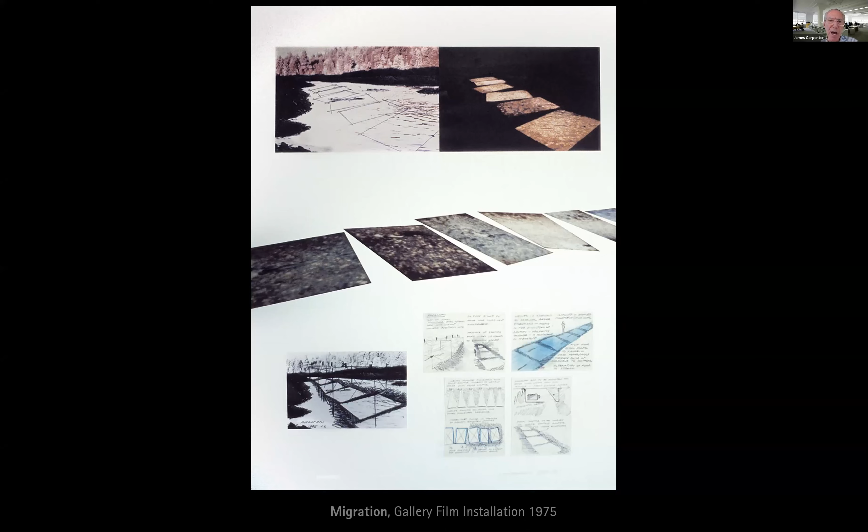In this instance, this is a small river in Puget Sound that runs by the University of Washington for introducing different strains of salmon. What we did is set up a series of cameras over the river, looking straight down into the surface of the water. You basically have a fragment of the entire riverbed with the movement of the salmon during their migratory journey going up through it.

What we're trying to capture here is: there's obviously this event taking place within the river itself, but if you imagine the thickness of that water, there's a reflective field of information on the surface in terms of the reflections, caustic reflections, and movement of the water. Then there's information within the water, which is the fish and other activation of the water itself. And then you're seeing beyond the water to the bottom of the river.

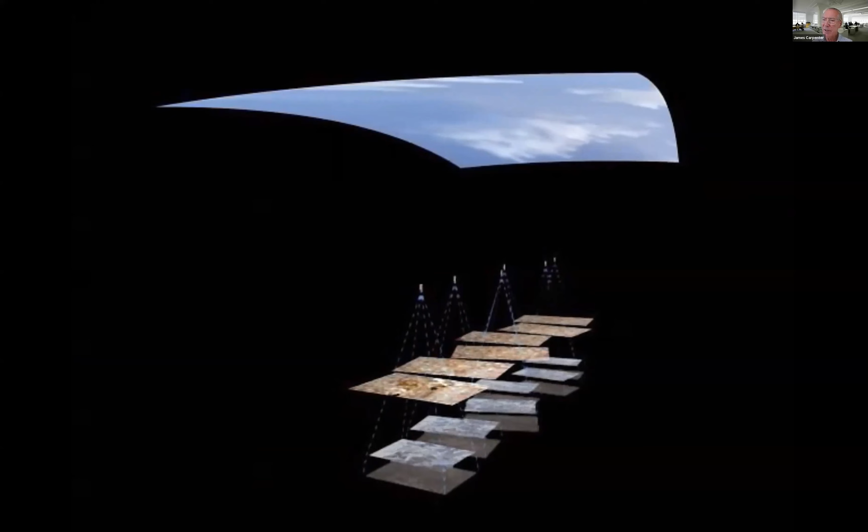This whole idea of a transparent material having multiple layers of information is really what we try to work on. This film, particularly in the installation, is about how the longer you look at it, the more you realize you're looking at this perfect reflection of the sky overhead. So there's always this level of information in front of us that we tend not to acknowledge, and many of our projects try to pull out of our context, or wherever the public space may be, events that are there but are under-acknowledged.

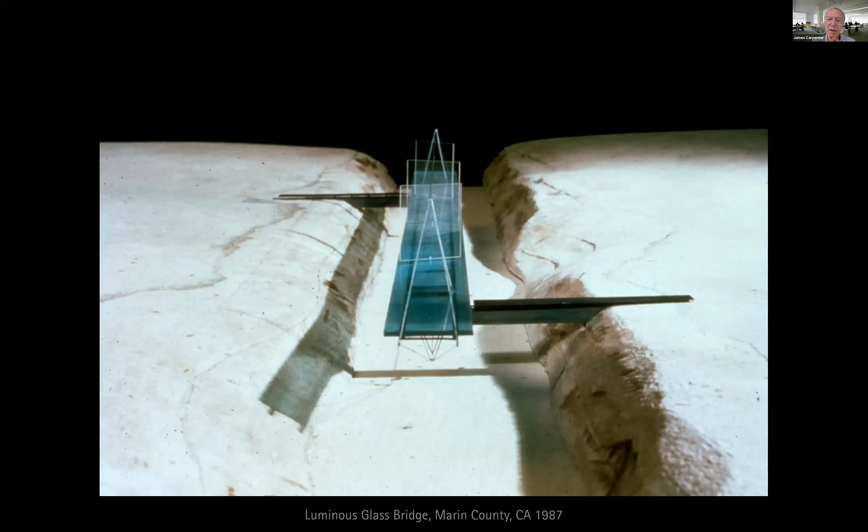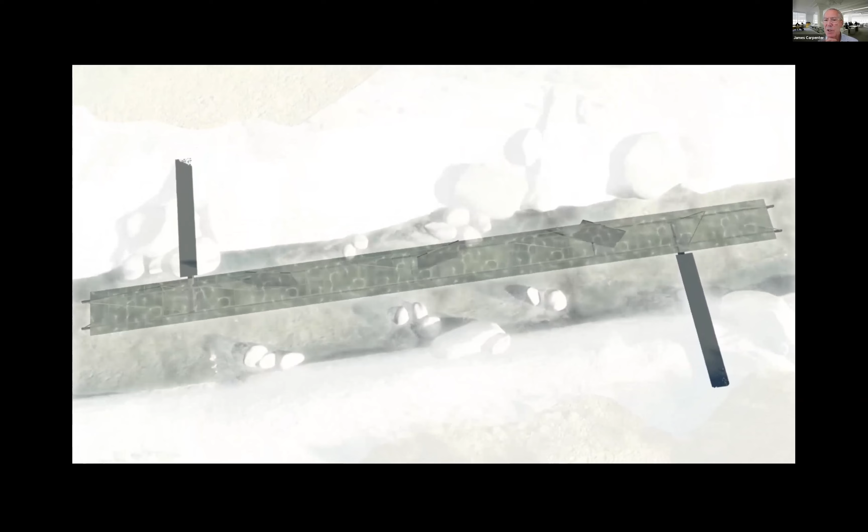So anyway, this particular film was from the mid 70s. If we look at the next project, about 10 years later, it was a commission for a small project, a bridge for a family in California. It's essentially a glass bridge, about 100 feet long, and you access it on these two gangways. Your movement of crossing the water is really along the glass platform, where you're moving in the direction of the river or against the direction of the river.

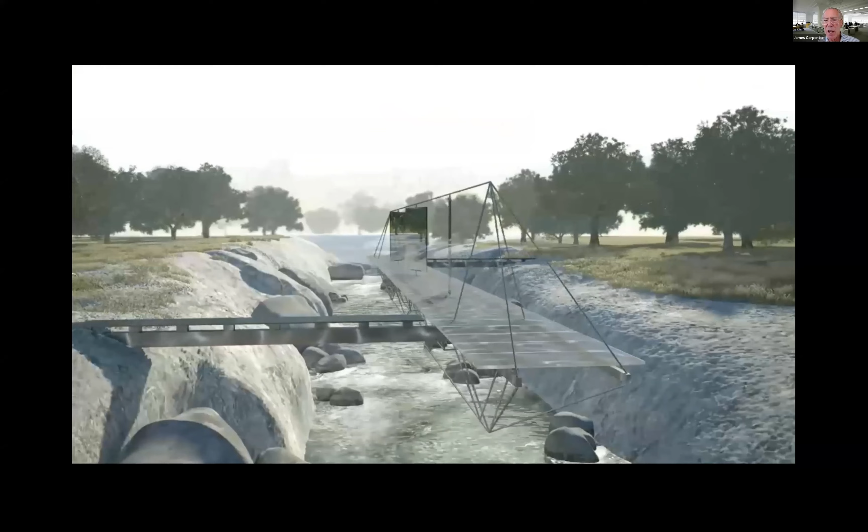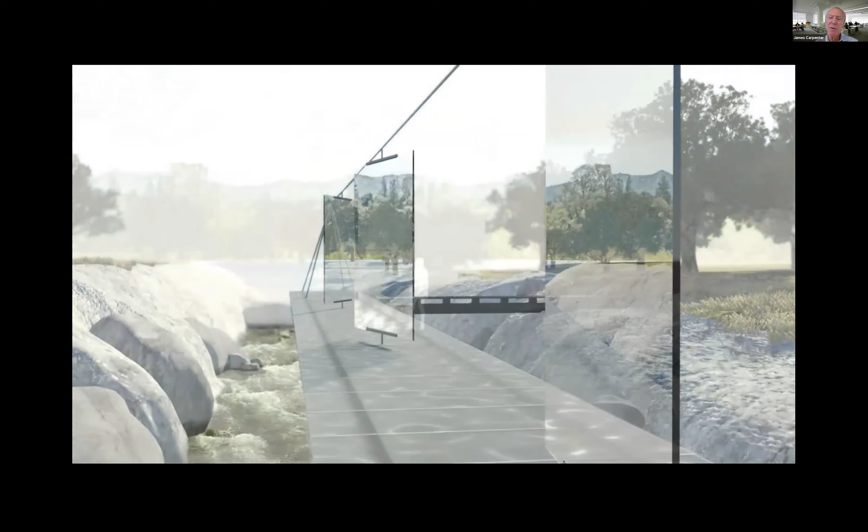So the walking surface, a sort of translucent glass, basically captures that reflected image of the surface of the water underneath it, so it's carrying caustic reflections. And the panels that move down the bridge are all slightly reflective, so they are basically superimposing different landscapes surrounding your passage.

The whole idea here is you're creating a moment in time where you can more deeply understand a particular ecology, and you have a sense of participating in this movement of the river itself alongside your own movement to get from one side of the river to the other.

So these types of projects, even though they were done quite a long time ago, are still sort of the root of many of the projects we do. And this is in Chicago, a project for the University of Chicago and for the city of Chicago.

What you're seeing on the left-hand side is really a plan for where the World's Fair would take place in 1893. The linear park you see there is what's in front of you on the right, done by Olmsted. The hope was to connect the lake at the north here to this inland park, and you would actually have boats and different things happening there.

But eventually this was just an ordinary sort of turf depression, and a very dark park connecting University of Chicago on the left there with the South Side community on the right.

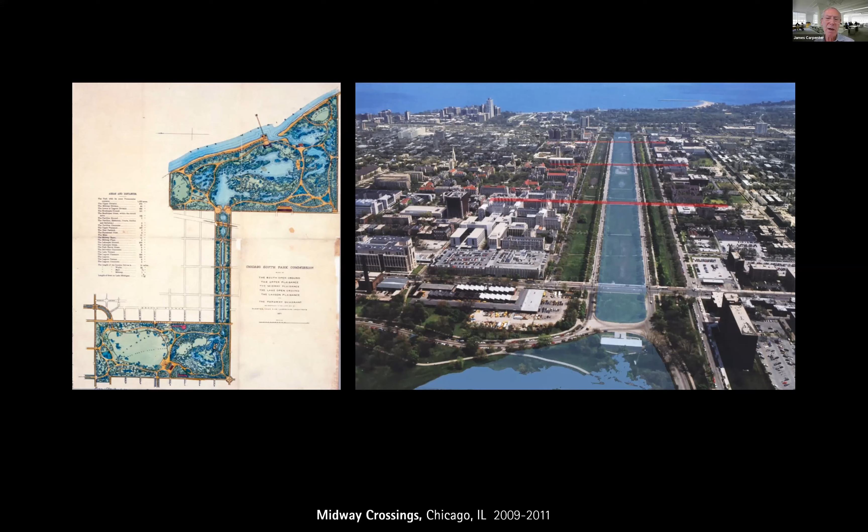So our task here was how to cross this park and make these parkways, the new axes across the park, much more vibrant, sort of safe, and very self-directive in the sense of wayfinding.

So we developed this whole idea of how to do these lighting towers, working with a company in Minneapolis that actually does filtration systems. We worked with them on making these towers out of continuously wrapped stainless steel wires around cores.

On the right-hand side, you're seeing the light source, which is basically just a quartz light source with what was called totally internal reflectance film. So it's really one source of light that goes up to the top of the mast and reflects back down to the mast, so none of the light actually escapes it.

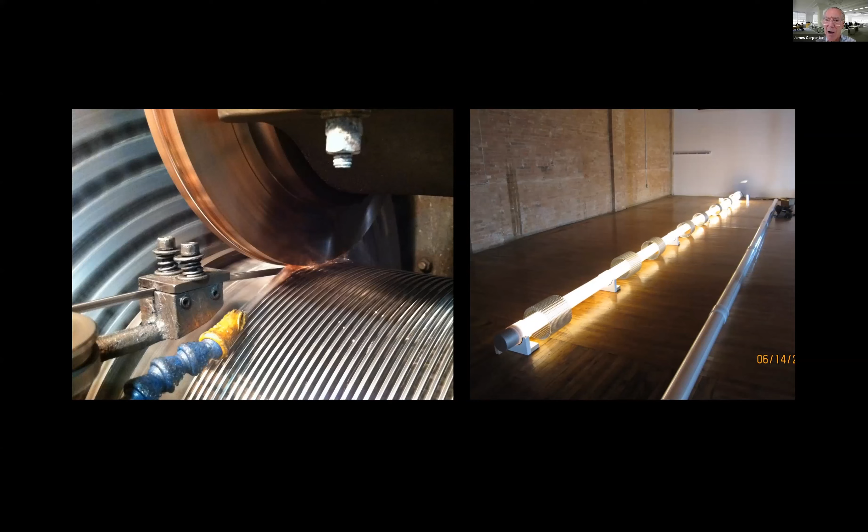In this image, we're testing the different densities of the cladding around that tower. By controlling the density and shape of the wire being wrapped, you create these actual columns of light that vary—there's greater intensity down low, and again a little more intensity at the top.

They are very different than conventional light fixtures, as you see in this transition to nighttime, in that they are emanating the light horizontally. So the figures are completely illuminated—you're washing the entire figure as you approach with the light source, as opposed to conventional lights, which are all coming from overhead.

Working with Schuler Shook, a Chicago lighting firm we've done quite a bit of work with, we removed as many of the street lights as possible based on the illumination we were providing. And then we created the center of these roadways as basically gathering spaces—right in the middle, there's a bit of landscape and some seating.

So instead of just rushing from one side of the park to the other, summer and winter, you actually have a place to gather and overview these public spaces where intramural sports take place, or a skating rink as well in the winter.

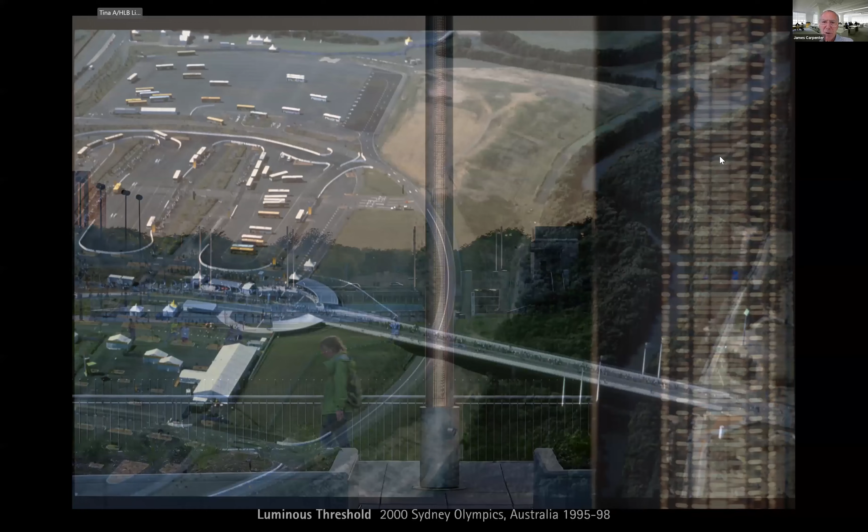This company is one that we've worked with quite often on projects, and that bridge we just showed you basically is a threshold between these two communities in Hyde Park and the South Side.

This is a threshold done in a very different way, for the Sydney Olympics back in 2000. This Olympics was really about reclaiming post-industrial, toxic landscapes, reviving them, capping some of the soil contamination, and returning them to public leisure use. We were asked to design the entryway to the park.

In this instance, you can see all the parking and athlete housing on the left, and you would move across this bridge into the Olympic Park itself with the stadium on the right. We took this small mangrove stream below the bridge and created this alignment of five masts over the bridge.

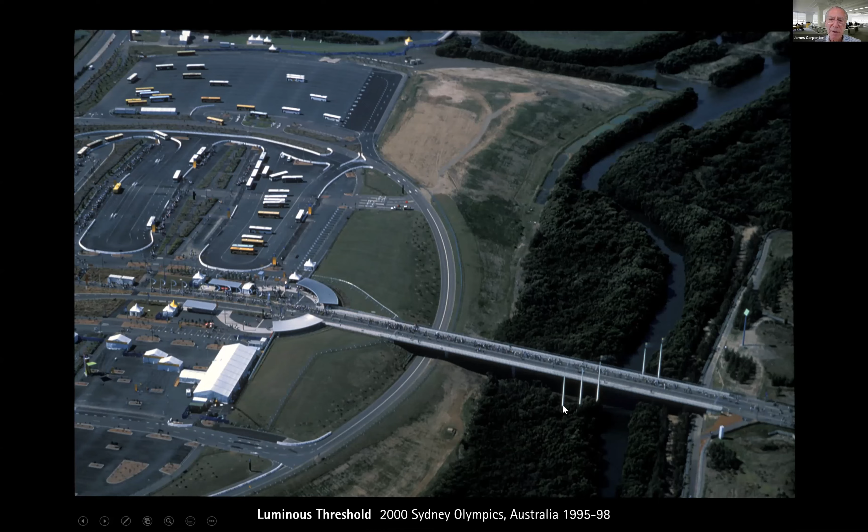The whole idea is to basically create a synthetic cloud. These masts are, as you see in the technical drawing, about 100 feet high, and the top 10 to 12 feet of each mast is a misting system. We're taking water out of the river, filtering it, and pumping it up under high pressure. Each mast creates a field of mist, and they blend together to create this cloud floating overhead when you're walking across this pedestrian bridge.

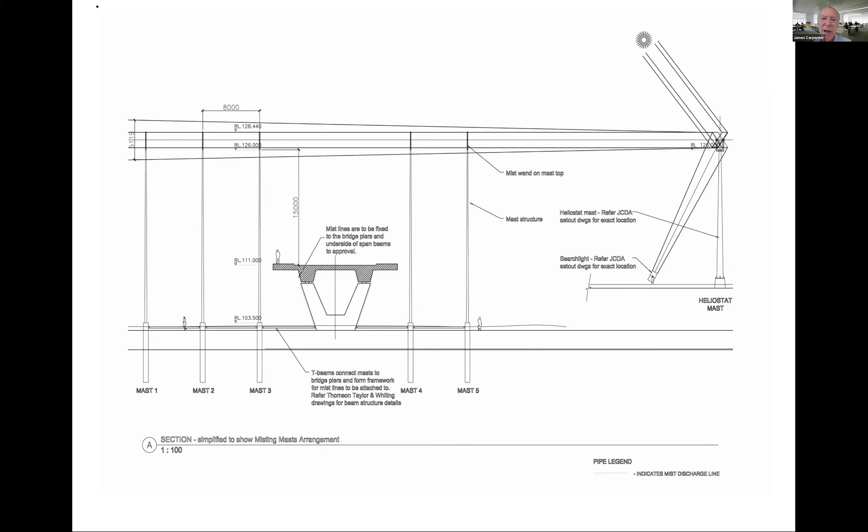So you're trying to counteract the intensity of the direct sun, in this case by using a filtration glass, a dichroic glass. It bounces all the yellow light back, to which your eye is very attuned and alert, and allows the blue light to pass through. So your eye actually picks up this whole beam of light. If it were not filtration glass, you would hardly see this beam, which is of interest—the eye wouldn't necessarily pick it up. It's just when you shift the color wavelength of the light that the eye becomes more aware of it. So this little mock-up led to the next image.

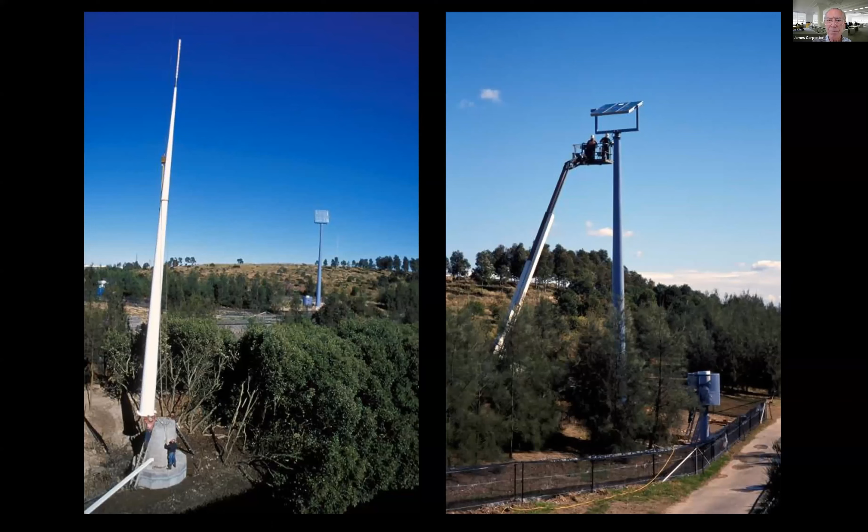This begins to show you the construction of it, the mast being built down in the riverbed itself. And then in the distance, you see the tall mast, shown again on the right-hand side here, with the men just getting the heliostat aligned.

The heliostat is basically a mirror system that tracks the sun all day long. Regardless of where the sun is in the sky, you can control a constant beam of light, which in this instance moves past and through the alignment of all the masts. The masts are all in a north-south alignment, and a beam of sunlight passes across the tops of each of those masts at all times of the day.

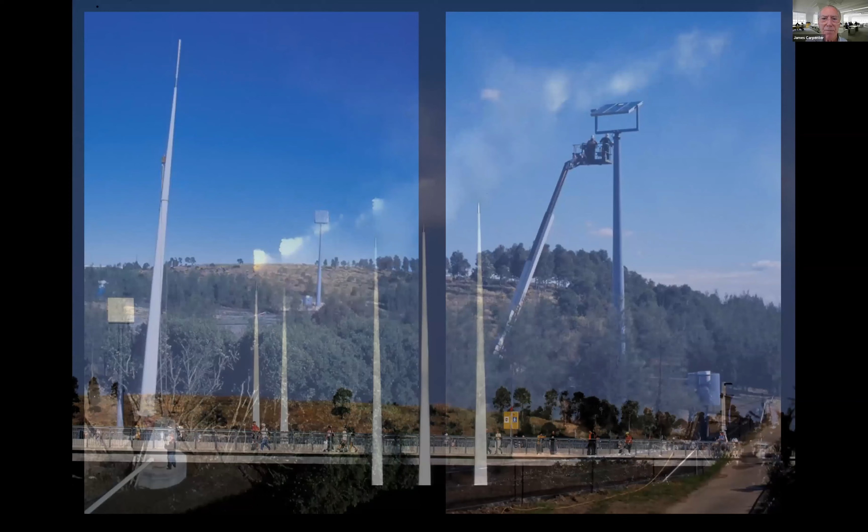So what happens when you walk into the park during the daytime is you walk through or underneath this cloud being formed overhead, and then you see this beam of light. Of course, with light, you don't see it unless it hits a target, so the mist is our target in this instance.

You're seeing it, and in certain instances it almost looks like it's on fire, but under different weather conditions it can be more fragmentary. On a very windy day it can be slightly more fragmentary, but on a very humid day you can get a solid beam of light that's literally almost a kilometer long coming off this one mirror.

So anyway, for the theme of the Olympic Park, this whole idea of renewal of landscape also deals with renewal of water resources. This is basically a work that draws your attention to the natural evaporation of water from the Earth's surface, its condensation in the air overhead, and its descent to the Earth by rain or mist. It's really just trying to take a process happening around us that we don't normally pay attention to, and allow it to become this signatory element celebrating this entry into the park.

So that's Sydney. I think that's the last image of that.

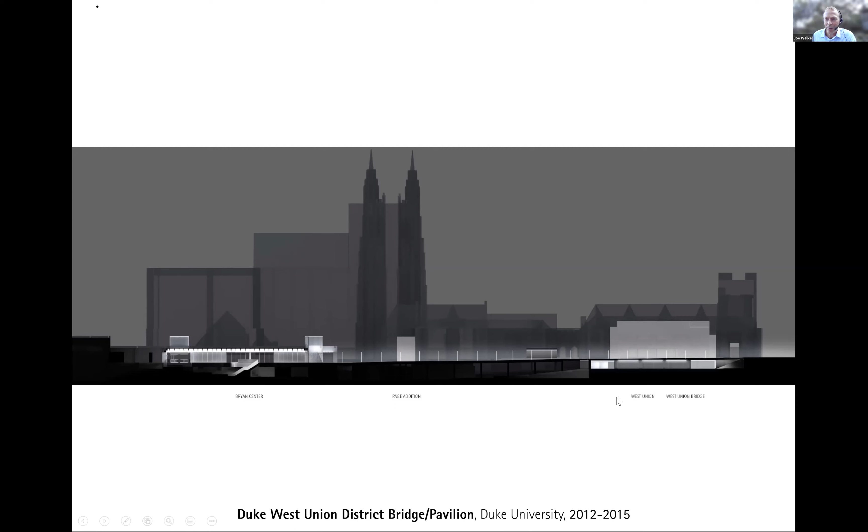So kind of building upon the threshold that Jamie was describing, this is a project at Duke University, North Carolina, which sought to expand and weave together some different parts that were very separate but occupied a lot of student use—specifically the student center on the left, an auditorium, and a bridge and kind of student gathering space on the right. This gives you an aerial view of what we were seeking to accomplish in terms of really knitting together what was a traditional part of the campus, but ended up having a lot of backdoor uses originally.

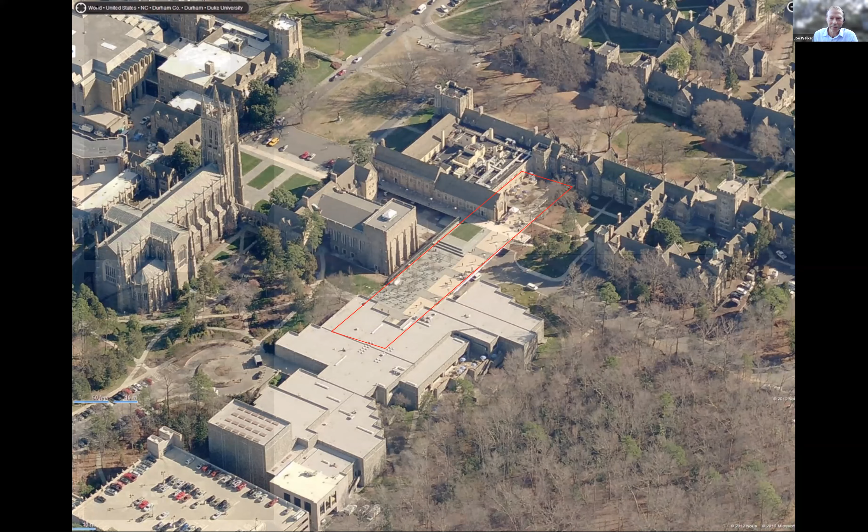There's some trash use and some things you wouldn't want to be part of your quad experience necessarily. So it was really an effort to weave together the better parts of the campus, specifically the Sky Dome, in an outdoor environment, creating a protected place where students not only could move across that threshold but also gather.

So this is a detail study that shows what we were seeking to do: create a kind of protected environment below that threshold, the bridge, and establish a space that also enhances the natural environment of the quad around it and the sunlight coming from above.

This top image shows that with some simple moves, like creating a reflective surface on the underside of a bridge, which is concrete, you can get amplified and redirected views to a landscape that's immediately adjacent, and filtered light that weaves through a tree canopy.

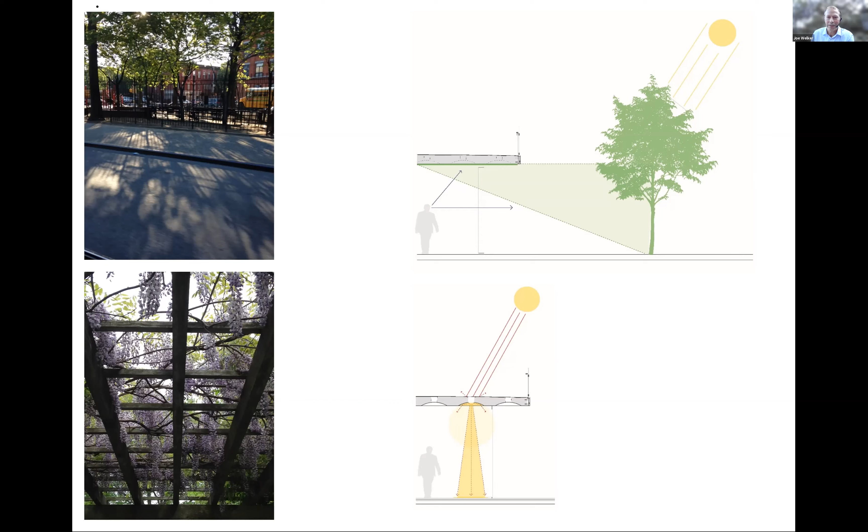On the bottom image, we worked with a series of lenses placed within the bridge itself. It gives you a real-time animation of what's happening above with people circulating, but a real sense of bright light and an uplifting experience that connects you to the larger campus.

These are some more details in terms of the material investigation. The image on the left is an acid etched diffusion on the glass that allows you to get a sense of activity and animation within the space without giving direct visibility, so you have some sense of connection while still feeling in a protected environment.

The images on the bottom show a glass production we explored with a group we like to work with. We work with a number of fabricators—as Jamie described the group in Minneapolis, this particular glass company is in Oakland, California. You can develop a very specific mold and casting tailored to the use and what you want to achieve in terms of light and optics.

In this particular case, this bigger lens you're seeing was the bottom portion of what becomes a kind of natural fixture—like a reinterpretation of the Sky Dome up above.

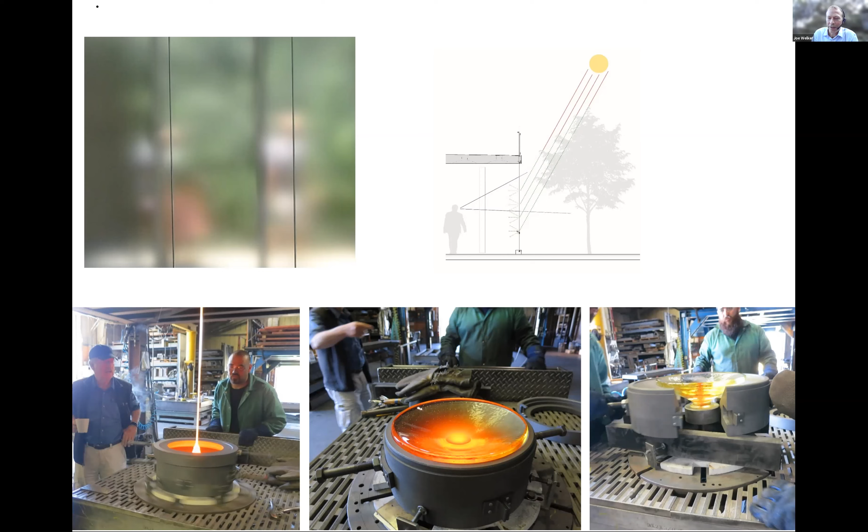So you start to see it in its actual application, with students in gathering spaces down below, and then you have these lenses that seek to capture as much brightness as possible from the sky above and redirect it onto that polished concrete.

We thought of the columns as part of that; we wanted to celebrate the structure of the bridge. The columns amplify a sense of trees and connectivity to a natural environment, both beyond and behind you, helping to establish an environment where you have a real sense of magnification of the landscape around you, yet still feel you're in a separate, contained environment.

This gives you another view down below the bridge, with the acid etched glass and a figure moving beyond as they navigate between the two elevations.

In some ways, a different type of threshold in New York City—this is the Hearst Tower by Norman Foster, where they had a historic podium, and then the tower up above, which is an office tower. There's a series of skylights that ring the historic structure along the street and the tower volume up above.

Our task was to ease the transition of people coming in off the street, from a light-filled environment, the New York City street, very noisy and congested depending on the time, into an environment where you see a transition and a real sense of both light and sound.

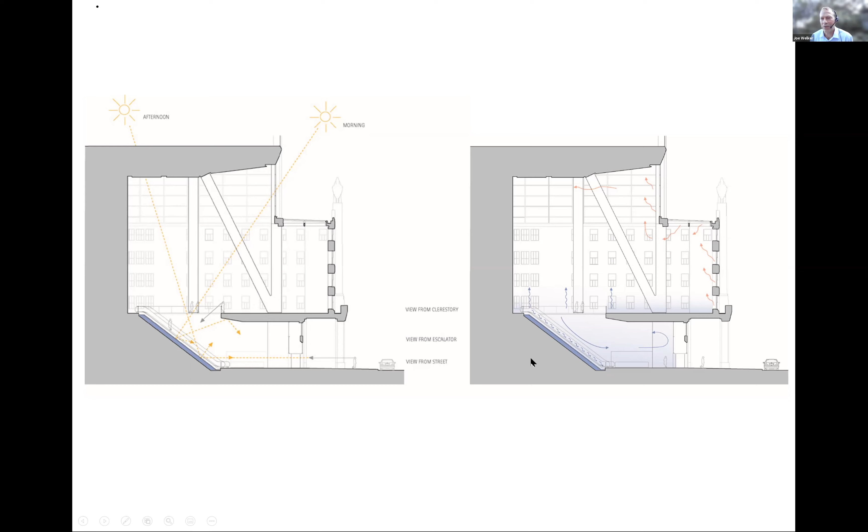The water is gathered on these rooftops, it's chilled, and then it runs down the surface of the glass here, a little bit over 20 feet. It provides a degree of evaporative cooling and creates an environment that's more calming acoustically, but also thermally comfortable.

We frequently try to mix performative aspects with what we're achieving visually. This is a very specific photo of liquid glass being poured into a mold.

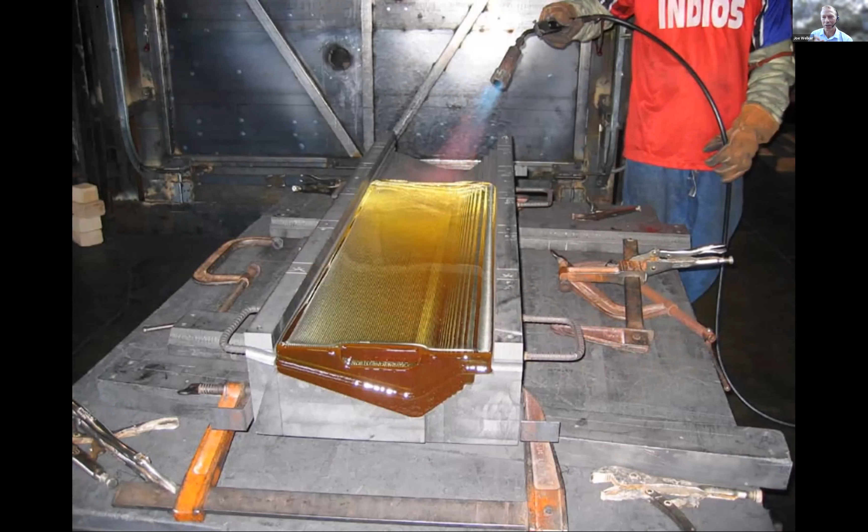This shows you the process in which these castings were developed. There's a series of end stops here, and the glass comes through a funnel up above and is poured and filled out into the mold. Then this goes into an annealing oven where the cooling process is slowed down, to try to ensure that the thickness of the glass doesn't create fractures, and you equalize all the forces within the glass itself.

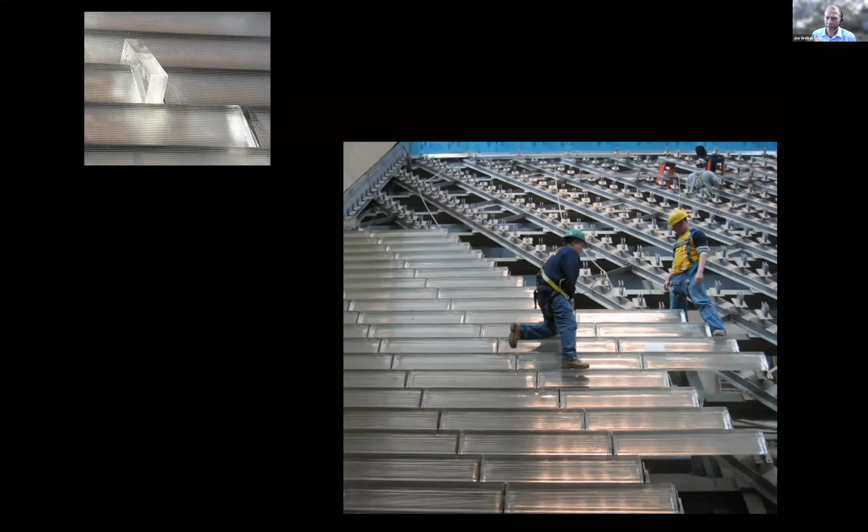But you can also see in this image, you're starting to see some of the textures that we can develop within these molds. By really detailing the mold and working with profiles that both amplify the light and the presence of light within the space, you can also play around with and investigate ways to slow the water as it moves over the surface. So you kind of choreograph it in a way that the water and the light start to move together as you move into this space.

This shows you installation pictures, gives you an idea of the scale. Two people would lift up one of these planks that you were seeing in that mold I was trying to describe, and then install it in a series of brackets that cascade down. You start to get a sense of the overall space here as you come into the lobby environment of the tower.

Most critical for us was really seeing this as a periscope device in many ways that really amplified your sense of sky up above. Even though you have this office tower directly above you, you have a real sense that there's a connection to the sky and the spaces beyond the immediate entry.

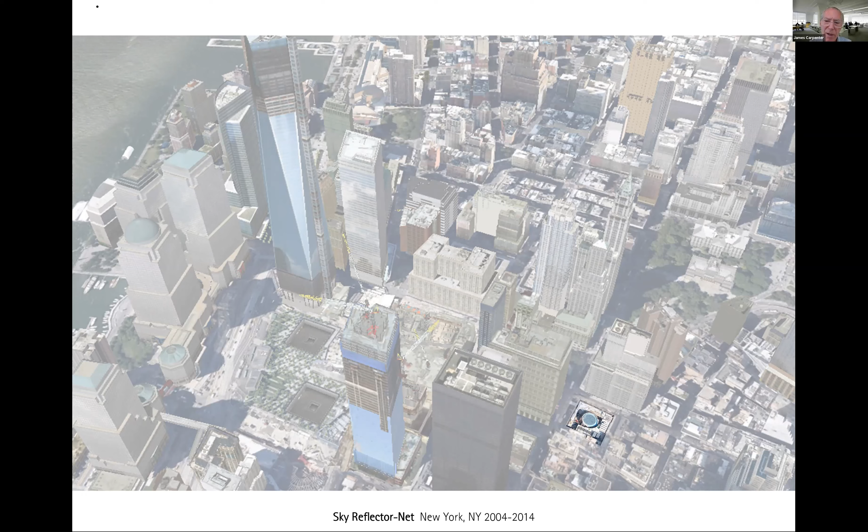So this is a new transit center in the sense that Grand Central is a transit center further uptown. Downtown never really had this type of interchange before. So the point of this building was to establish better circulation between the different subway lines.

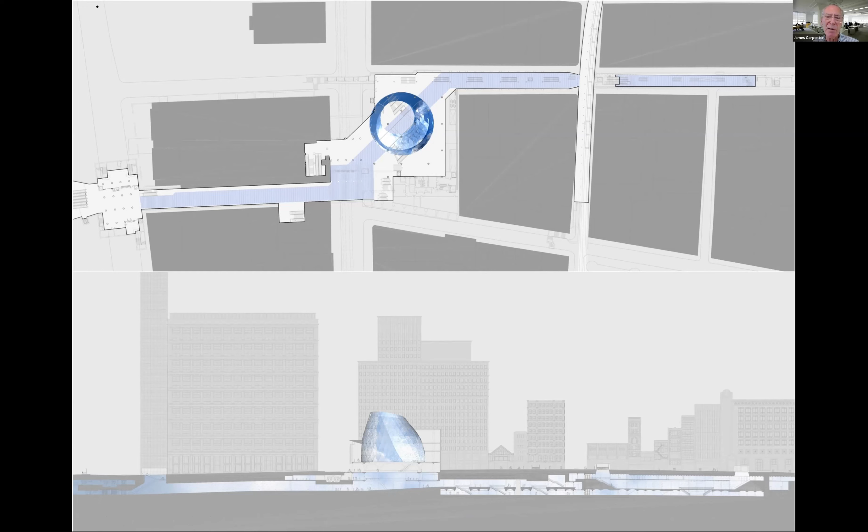This is basically our drawing from the original competition entry. The main focus is on this central oculus piece, but we were also trying to encourage using daylight devices in all of the entries up at street level, so that there'd be a natural daylighting opportunity to be used as wayfinding throughout the whole system.

This project started in 2004 and was completed, I think, about 2012, something like that, or even later maybe. We had a different form to begin with, and then through the process of design, of necessity, we had to change the whole roofscape, and it pushed us in a direction which was actually better from our perspective in terms of being able to animate the surface.

Typically when you have a skylight, your view of the sky is framed very precisely by the boundary of that skylight itself. In this instance, we have the skylight overhead, but we also have these two curved surfaces extending down into the building.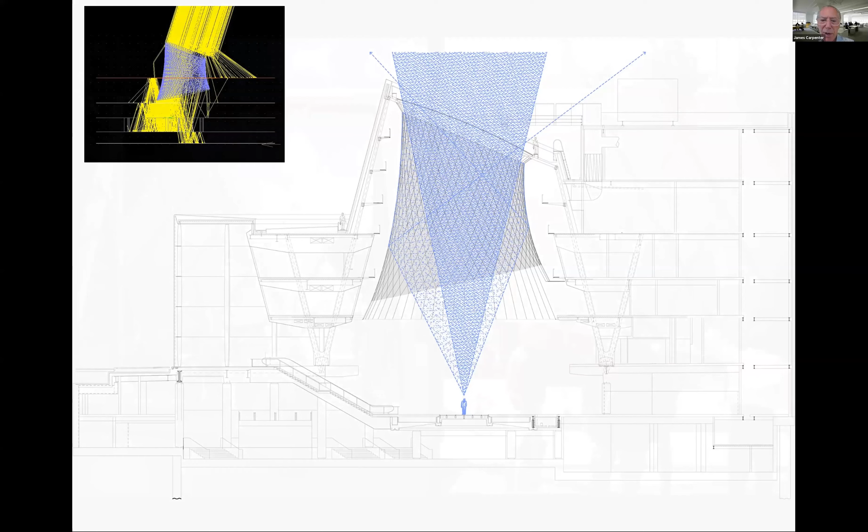The whole goal here was to bring light down below ground, down to the subway track levels, and have this place be very celebratory.

We're working with Arup. There are a lot of issues behind this form, which is all the smoke evacuation systems for the subway itself. So the whole idea is that the form is what they call a smoke reservoir. If you had a big fire in the subway system, smoke would rise up into this cone-shaped form, and then the smoke goes right through the skin to the exhaust fans behind it.

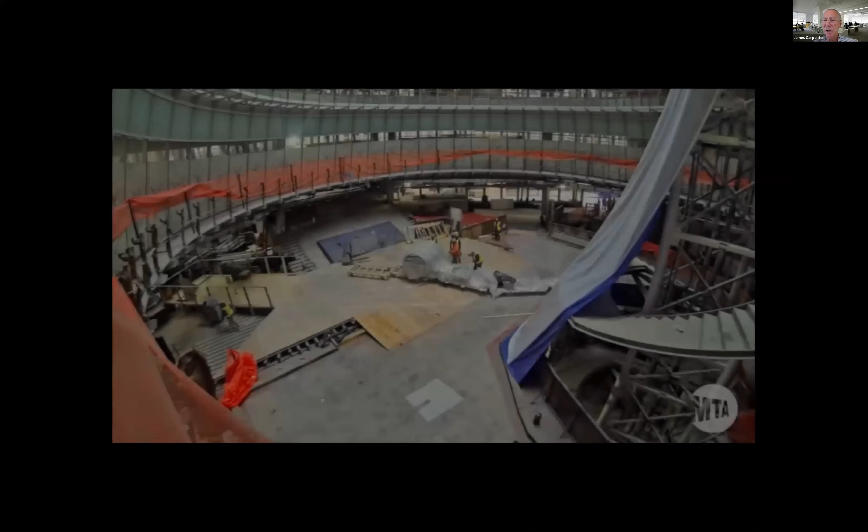So to Joe's point, a lot of our work has built into it - it's not really overt, but it has a more performative aspect to it, as well as visual and optical effects. The porosity is all changing along that whole form, which is about 90 feet high.

And you see how it's constructed. It's all a two-way cable net structure. The advantage of this is that it's all built off-site, predetermined in terms of its geometry.

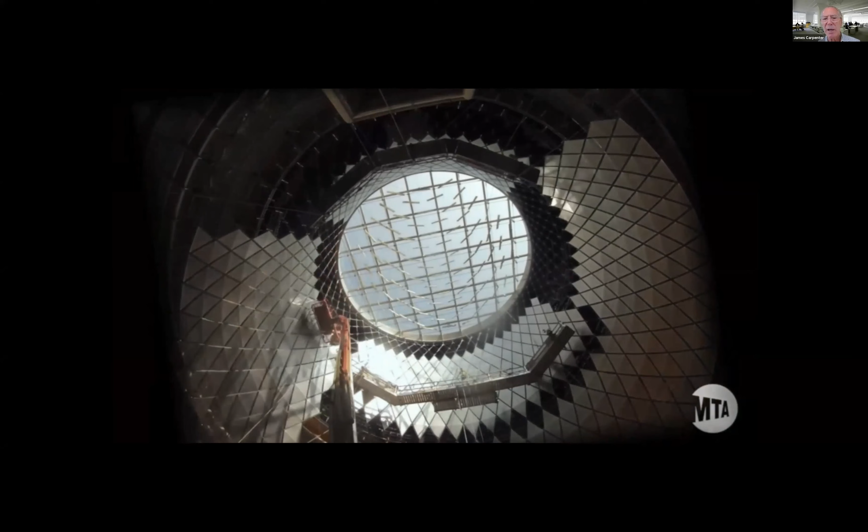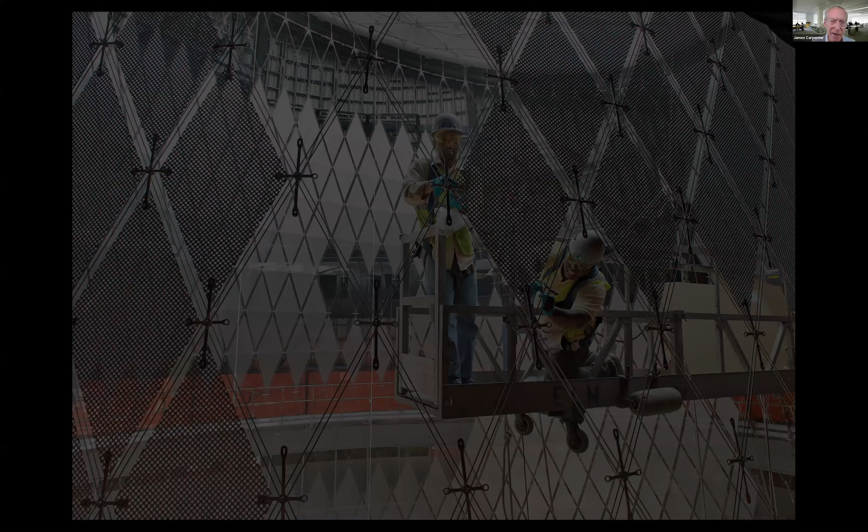And the men basically just have to secure it at the top of the form to a compression ring, and then down at the bottom, first floor slab, and then tension it, and then apply these panels, which are made out of optical aluminum, which we use in quite a few of our projects.

Optical aluminum is simply a very thin, almost pure aluminum that's been pressed under high compression with a very fine texture. And then that thin aluminum is mounted to a conventional aluminum behind it.

So you have a much higher degree of reflection here, up to like 94, 95% reflectivity off of this aluminum, but it's actually a diffuse reflection. It's not a mirror reflection.

The light can actually reside on the surface, and it's not necessarily just bouncing light, because the problem obviously with a mirror is that you either have a reflection of all of the light, like 100% brightness reflected towards you, or if the light source is positioned elsewhere, it's totally black. So either have absence or presence of light with a conventional mirror.

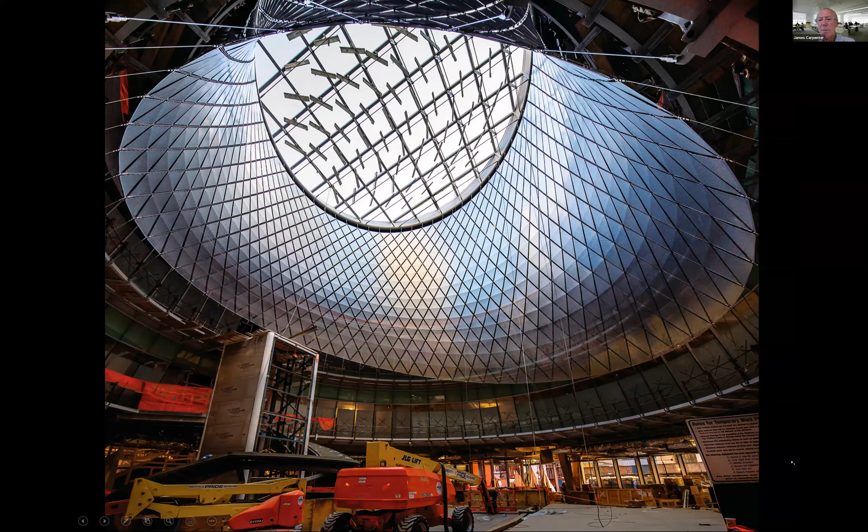With this type of diffuse reflective surface, the light is actually distributed much more uniformly across its surface, and it always possesses some level of brightness to it. So this material is critical in this instance.

So as you see the next image, what you're looking at here, I just described in the earlier diagram, this shape. It's sort of hard to tell what that shape is if you don't see a cross section of it. It's a fairly extended form. And what you're looking at here is in the building.

If you look at that white area at the center of this ring, that's actually a cloud in the sky back over your head. So you're actually looking at the sky plane behind you in this instance and seeing clouds around the perimeter moving. So you can actually sit in this space at certain times of day - early morning, later afternoon, not when the sun's directly overhead, where it's too much light - but at these other times of day, you can actually see the shift in the color of the sky, and you can actually see the movement of clouds brought into the building.

So again, it's a little bit of a fragment of cinematic behavior, which is something we do try to work with. I hope that's sort of been consistent in what we've been showing you. There's this whole idea that there's a degree of animation to the work, and your perception of it or celebration of it as an individual is totally unique.

Somebody standing 6 feet away from you is seeing something quite different. It's this whole idea that everybody in this space is seeing something slightly different, but you're all collectively understanding that there's this idea of the image of the sky being folded down into the space with you. So it's a fairly simple optical principle, but one that we don't think has been deployed successfully very often, and this was a perfect instance to try to make that work.

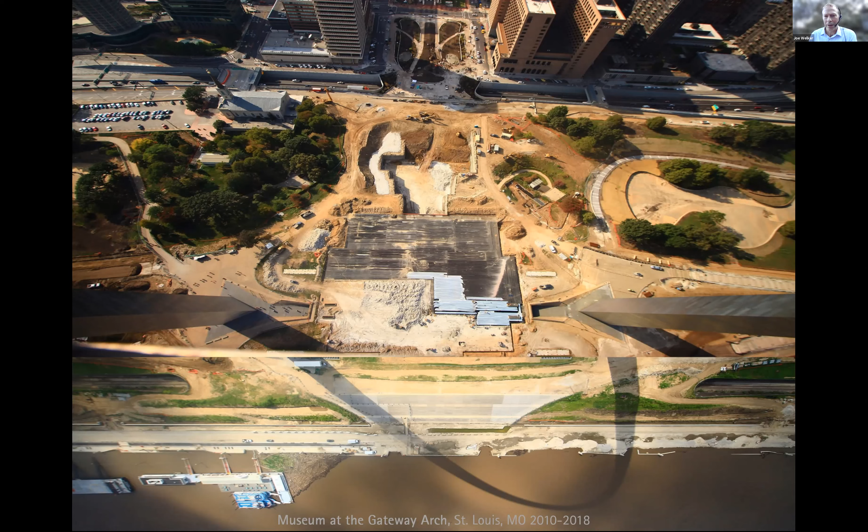So it was a massive - well, a large museum that didn't have a real connection to the city. When we got involved in this project through a competition in 2010, we teamed with Michael Van Valkenburgh and other team members in a successful competition bid. I think one of the critical things was really connecting and reinvigorating this urban park, which is a bit unusual, but we're not so unfamiliar with it in New York.

There's a couple of urban parks that are part of the national park system, connecting it with the city and really enhancing both. So you have a new landscape that could weave itself into the courthouse - this is the old courthouse where the Dred Scott case originated. So a very significant historical part of the National Park Service, and really weave these two together.

And obviously the destination piece, if any of you have done this, is to go up to the arch. This is, I think, still the tallest building in St. Louis. It's about 630 feet above the ground plane here, and you can see the river over here.

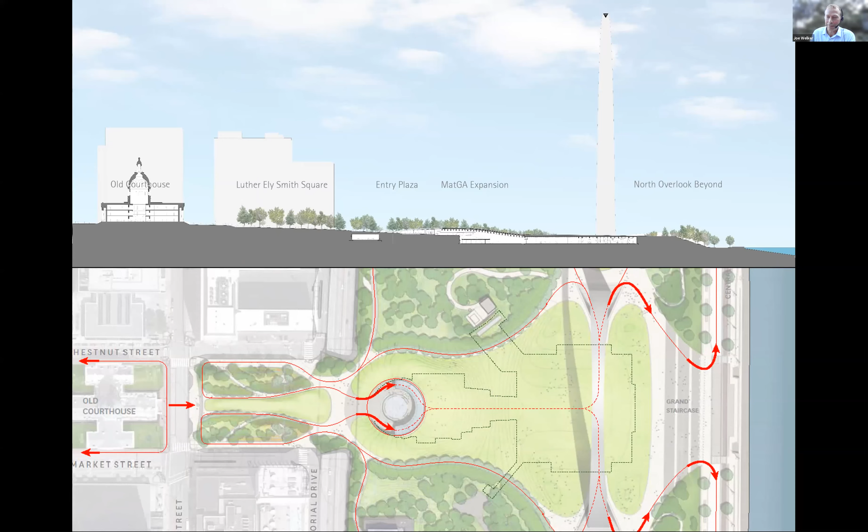So what we were really trying to do was to create this recentering. One of the magical things about the arch is it's a monument that isn't an object, it's really a space. So it really lends itself to weaving through the landscape.

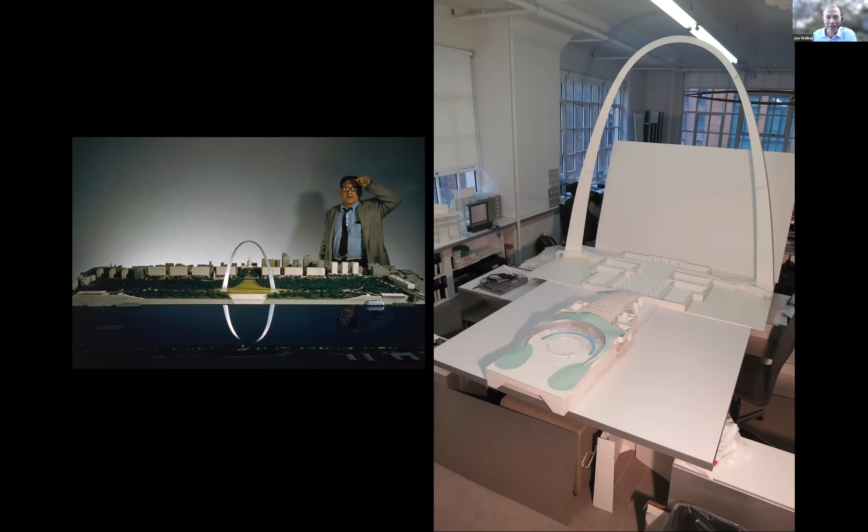So this shows some scale comparisons. This is the original arch grounds, and Saarinen - looking at the successful competition, a very dynamic form. And there you can see the space that's really created, the view from the Illinois side looking across towards the Missouri piece of the project, and all these connections that happen between.

There's bridges here. There was an early push to really make a connection to the East St. Louis part of the project, but that's still something that would hopefully be resolved - it wasn't something we were able to include as part of this competition.

This shows you a model that kind of lifts the roof off of what we did. That original construction project showed the roof of the existing museum here, and our work really involved working closely with Cooper Robertson and Michael Van Valkenburgh's team to weave the landscape and the architecture together. Our work was involved in this addition space.

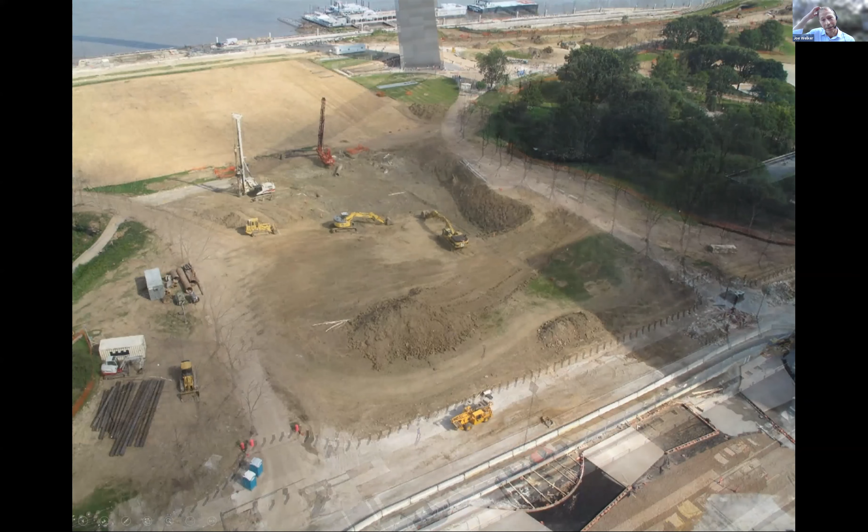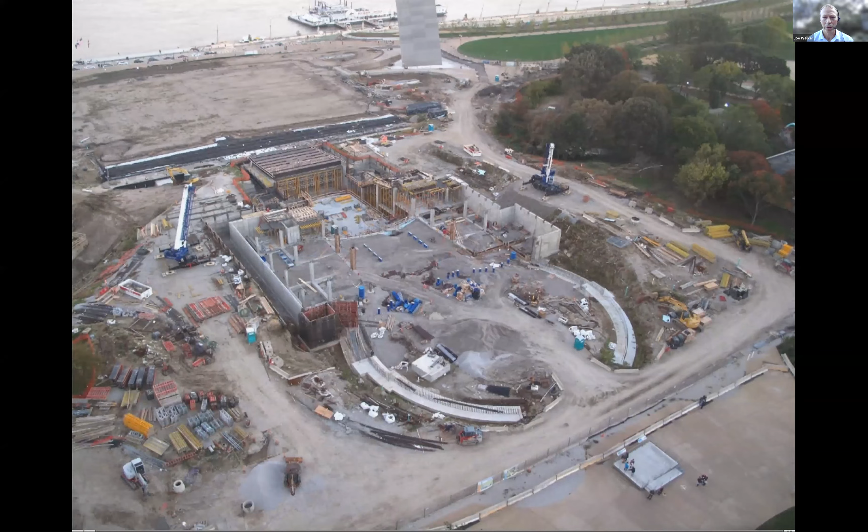That kind of sets up the threshold that Jamie was starting to describe, where you create a redirected view and connection back to the city. This is a time-lapse set of images that shows the existing historic lawn, and removing that in order to tuck this set of spaces and the new addition to the existing museum down underneath the ground.

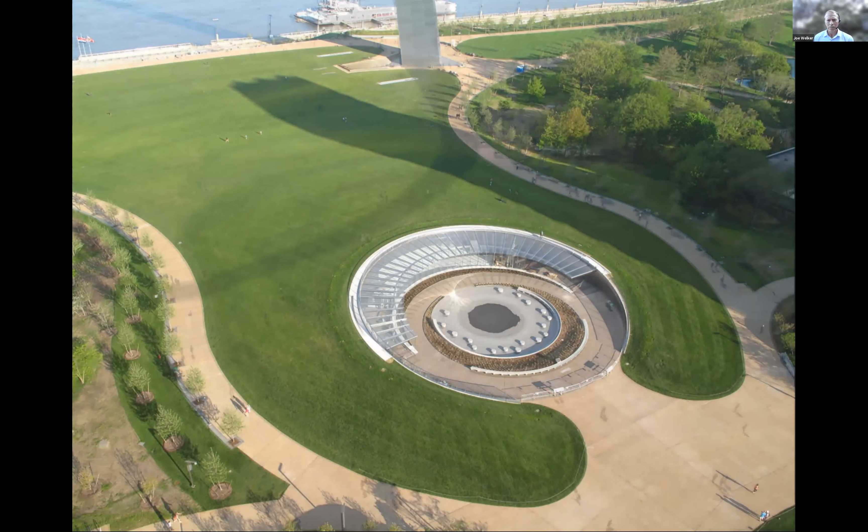One of the challenges here, obviously, being underground, is how do you give some clear orientation and a welcoming presence to go underground before you go up in the arch, and a real connection to the sky and the city context. So many of these moves here sought to amplify that.

Specifically, there's a series of bent glass panels designed for a very stringent blast criteria, a very lightweight tensile structure that we worked with Eckersley O'Callaghan to develop, pulled down and really amplifies in many ways the environment, in the sense that when you approach here, you can see the sky embedded in the ground itself. You also see reflections, depending on the view and where the sun is and the time of day, of the courthouse behind you.

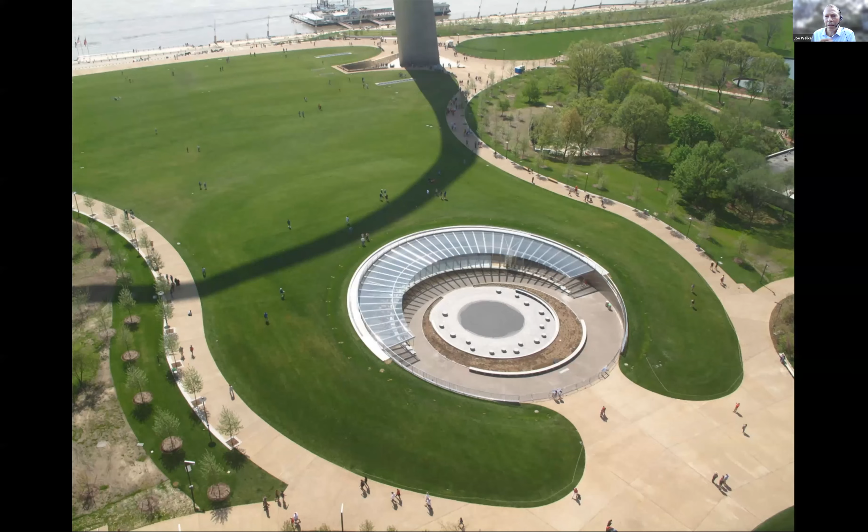It really seeks to become a viewing device that amplifies those connections to the courthouse, the city, and the arch ground. So this is an aerial view of what I was trying to describe before. That previous view was standing here looking across towards the river. This gives you an idea of the lanes of traffic and the highway down underneath.

So it was a very extensive development and set of planning moves done by the Van Valkenburgh team to create a park that extended right across the highway. It always gave you a sense of being in a landscape and not being aware of what was going on in terms of infrastructure and connectivity for vehicular traffic.

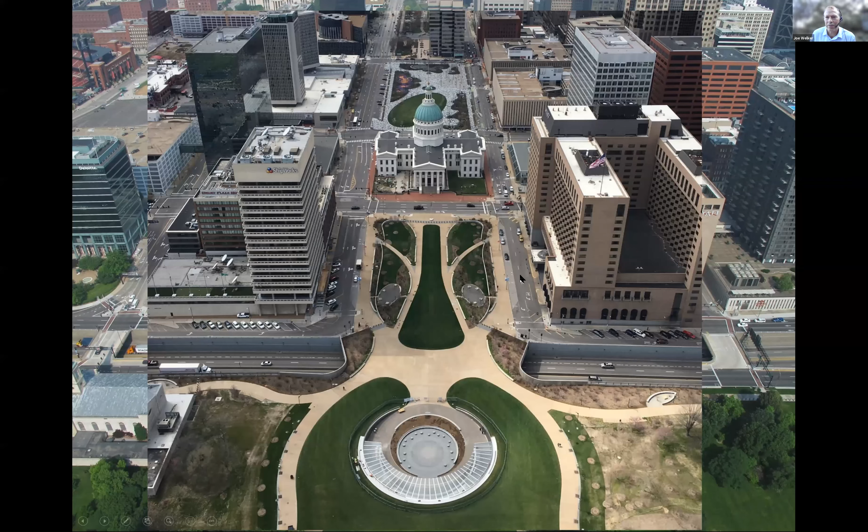One of the critical things with this project was that you see it as a catalyst for the city. Getting people out of their cars - many people would come to the city, go up in the arch, and then leave and never visit the city. So this was an effort to really reinvigorate foot traffic along all these businesses and get all the participants within this immediate proximity to benefit from the arch redevelopment.

Jamie was talking a lot about the Alanod material and kind of sense of brightness that you get within the plane. This is a model developed in our studio of a ceiling that I'll show you in a subsequent photo, of that space down underneath the ground that gives you a sense of brightness and connection to something above.

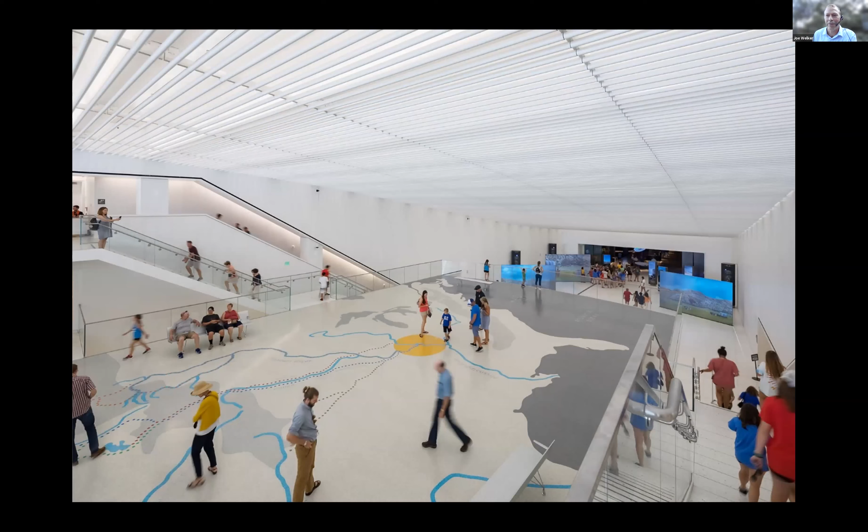We weren't able to go through that historic landscape with skylights, so this was a tunable LED system that works with the daylight cycles outside to amplify your connection to that kind of small aperture that we have in the project, but really give you a welcoming arrival space and transition as you descend over 24 feet from your arrival point down into the new

connection. This is the threshold to the existing museum. Everything you see beyond this opening, the rectangular opening here, was the existing 100,000 square foot museum space. In between this, what we've done is work very closely with the structural engineering team and others to develop a lighting system that works with the structure.

There's a series of post-tension beams that span over this entire width, and in between that, there's these optical aluminum panels that Jamie was describing. We developed a custom ceiling system here where there's a series of lights that shine up onto that optical aluminum, and that amplified brightness comes down onto the walking surfaces, both here at this mezzanine level, at the lowest level, and at the entry level.

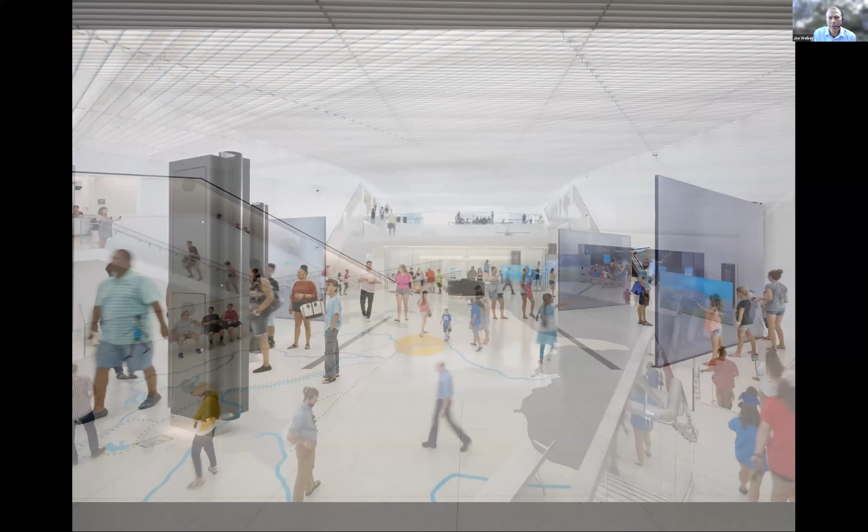So you have a real connection to something above you, kind of a perception that there's space above, and also directly back - you can kind of make out the courthouse. We've been in this museum, Jamie and I together, where you actually see light, Western light, a beam of sunshine, a line of sight, comes straight down all the way

through, almost to the existing threshold into the existing museum. So there's a really direct connection to the outdoors here. Even though we were working with a reduced aperture, by creating geometries that work within that, we were able to connect a little bit better to this kind of moment outside.

This is a park that was developed by Michael Van Valkenburgh's team with a fountain that kids play in. I touched briefly on the notion of a memorial that's not an object, that's a space.

One of the things that was really critical here—it wasn't our first design or second design—for a new entry, was the idea of universal access. So there are no entry doors on center, directly in axis underneath the arch. The entries are all on the edges. By extending the length, we made sure everybody travels the same path, but also comes on axis, moves off axis, then on axis again.

There's this constant shifting, almost as if the circulation paths were like water going down a river, avoiding rocks or impediments in between. So there's a kind of flow that results.

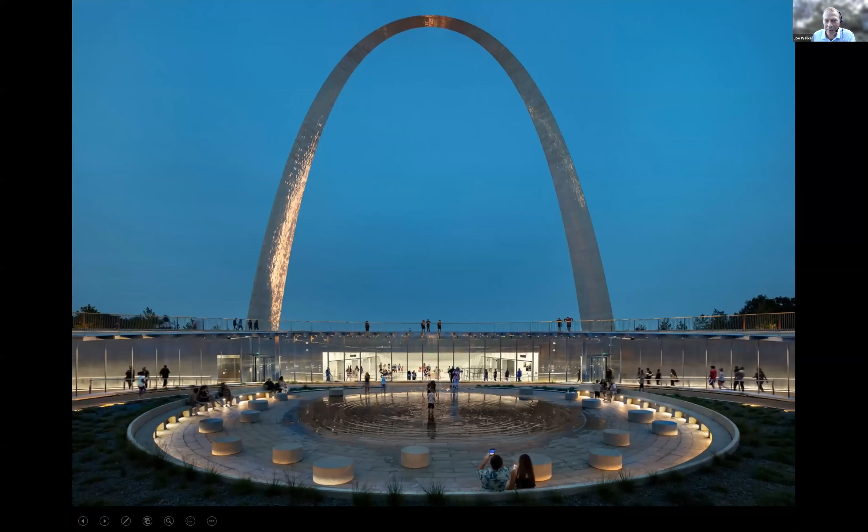I was trying to describe some of the optics that happen within the glass itself—you get reflections back to the courthouse spaces. It sets up an overall assemblage that is very deferential to the monument, while seeking to really establish a threshold, a new kind of uplifting, welcoming experience into the arch itself.

This is obviously a point of a lot of civic pride for people in this part of Missouri. This is their annual festival, 4th of July—they have a huge crowd of people on top of the new addition, the existing addition. This is the type of thing we talked a lot about with the structural engineers; the loading makes everybody nervous, but it really creates a civic space and a place for people to be and connect with.

So here we are moving into a very different environment compared to the hot and humid Midwest—into Israel, a very interesting environment, Israel and Jerusalem in particular.

For those interested in lighting phenomena—if you looked at a geological section from the Mediterranean up to Jerusalem, which is due east, and then from Jerusalem dropping down into the Dead Sea Valley, you see something quite unusual. On one side of this high point, the city of Jerusalem, you have a Mediterranean climate with very high moisture, lushness of plant life, and particulate matter in the air from that. The opposite happens when the wind blows from east to west, bringing weather off the desert, which extends for 1,000 miles east of this location, producing enormous dust storms—not moisture in the air, but the opposite, a different kind of particulate matter.

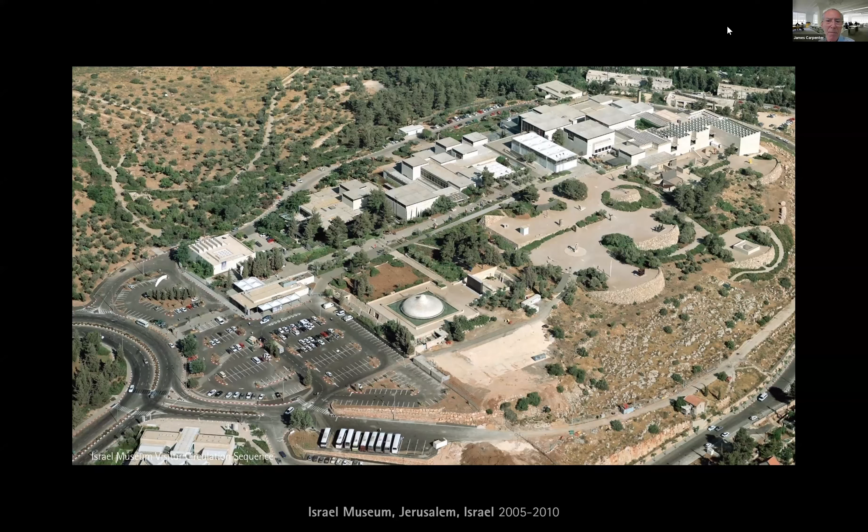This is a museum with a very extensive collection—it's sort of like the Metropolitan Museum of Art in the sense that it has ethnographic, archaeological, contemporary, Middle Eastern content, a full breadth of painting, sculpture. What you see in the foreground, that little white shape like a Hershey kiss, is actually the Shrine of the Book, the place where the Dead Sea Scrolls reside—a very beautiful building done by Frederick Kiesler. The garden with the curving stone walls is done by Isamu Noguchi—an interesting outdoor sculpture park by Noguchi, the Dead Sea Scrolls building, and this original set of buildings.

As happens in a lot of projects over time, the clarity of the original scheme gets lost by added pieces. So we removed a lot of those added pieces and added a series of 5 new buildings. A key thing was dealing with entry, where the cursor was there, you enter the campus there, and then have to go up about 30 to 45 feet vertically, and then go down into the entry of the museum. This is how it was originally structured.

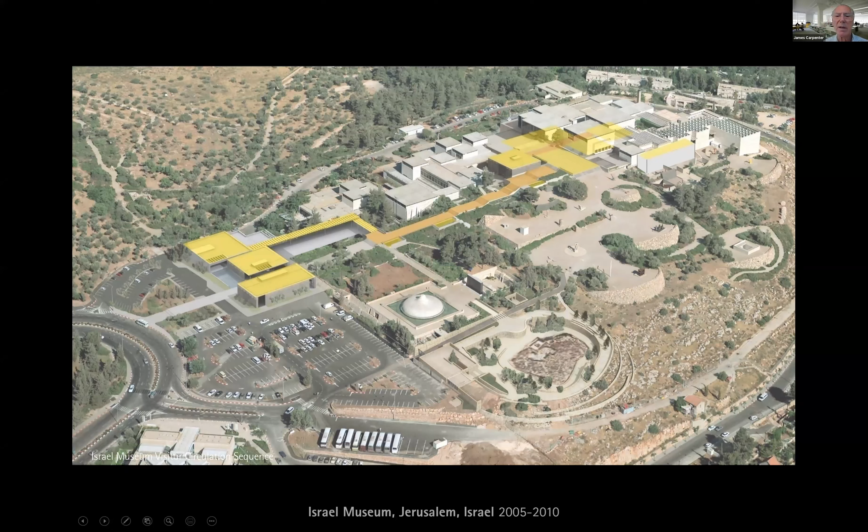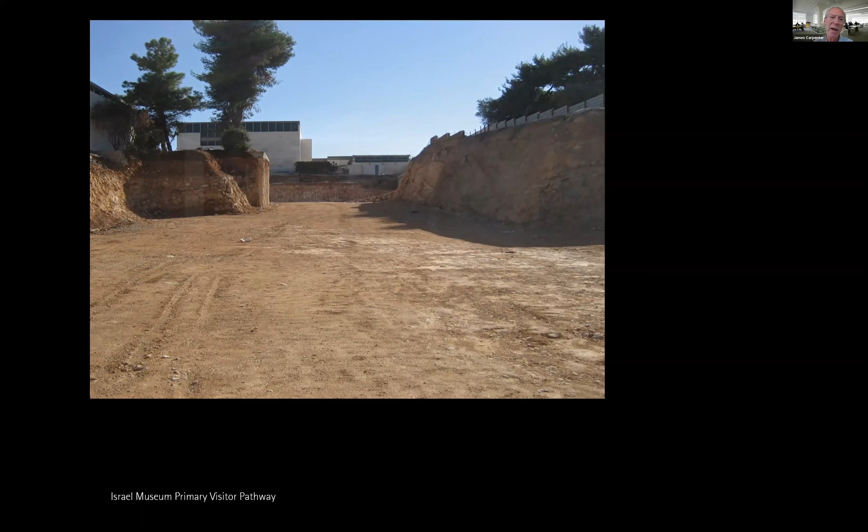What we needed to do was build a new entry pavilion, which is where the cursor is now, a little bit further up in the core of the building. Next you'll see some of the work necessary to create universal accessibility access, which is basically carving right up through the center of the campus under that existing walkway, a level passageway. These are the original buildings.

This is what's in that passageway below ground. It's basically a long pedestrian walkway, about 100 yards long. It brings in light through a skylight overhead on the right-hand side that goes from 18 feet below ground up to 50 feet below ground. We're trying to manage the daylight availability so it feels consistent on your way up. You're not going into a darker and darker environment, you're going into a somewhat uniformly lit environment.

So it's a black floor and a black wall opposed by a white ceiling and a daylit, translucent glass wall. You're just working with two bright surfaces and two black surfaces, and how these play off each other. The color is carried down through the different materials, and you really feel this piece at the top, which is Olafur Eliasson. But this is the main tunnel, the main experience coming in.

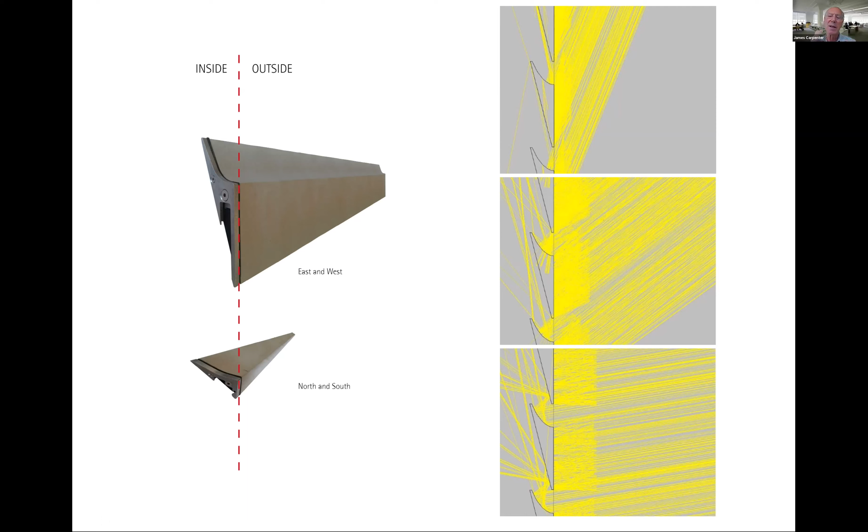So what you're doing is keeping out the harmful solar radiation of this part of the world using the ceramic tile, but then taking advantage of that light to wash the inside inclined surface of the tile above it. So you have something that's both a shading device and a lighting device simultaneously. I'll show you—the north-south is a very different shape, obviously, because of the inclination of the sun.

These are early study models, so we have just glass walls behind these shading systems. None of the buildings receive any direct light, so you can scale back the mechanical systems of the building and save a lot of money while having a lot more glazed area in this type of undertaking.

And then this is sort of what happens. This is just a test in our office where we typically build mock-ups of all of our projects full scale and then study them. And this is sort of what you get.

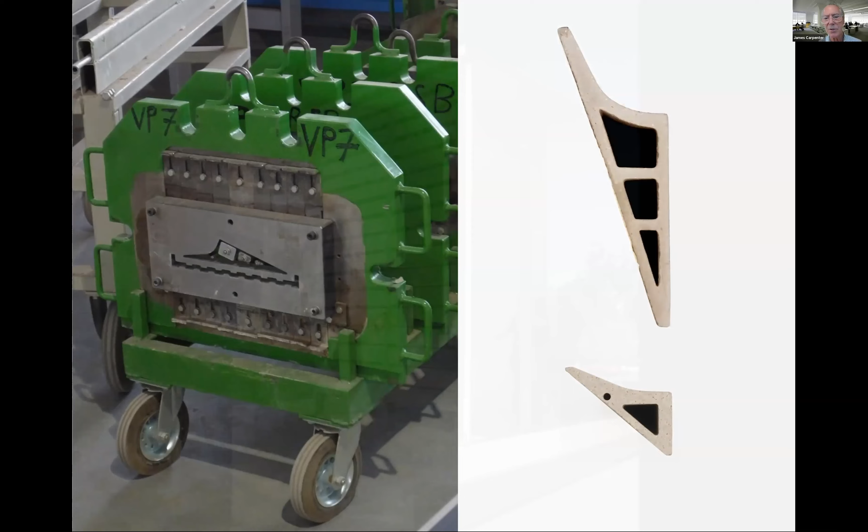You just get shadow play and color play from the interior. So if you jump to the next image, just the way these things are made, these are ceramic extrusions. We design the piece in our office and then mock it up with those cardboard models you saw earlier. East-west is top. Full-scale mock-up built on site about a year before construction began to test it for cleaning, and it really does not need any cleaning.

It's sort of self-cleaning. And then the building. So if you just look at this image, we're looking from the north to the south here. In the north and south, we've used a very open louver because the inclination or angle of the sun is so much higher. You can space them more apart from each other. So we have visibility into these buildings now.

The original buildings, as you see in the distance, were solid concrete blocks, so you had no idea if the building was open or if there were people there. This whole idea allows the building to have more animation and presence for the public on this north-south axis, and it has 100% shading east-west on the opposing angles. So this is both view in and view out.

So we go forward here a little bit. This is the idea, the walkways are shaded by the screening systems. And there you have one of the buildings, the conventional building, just floor to ceiling, clear glass, laminated, no tinting, no coatings at all. You're able to reduce the mechanical systems by about 30% because there's no solar radiation load.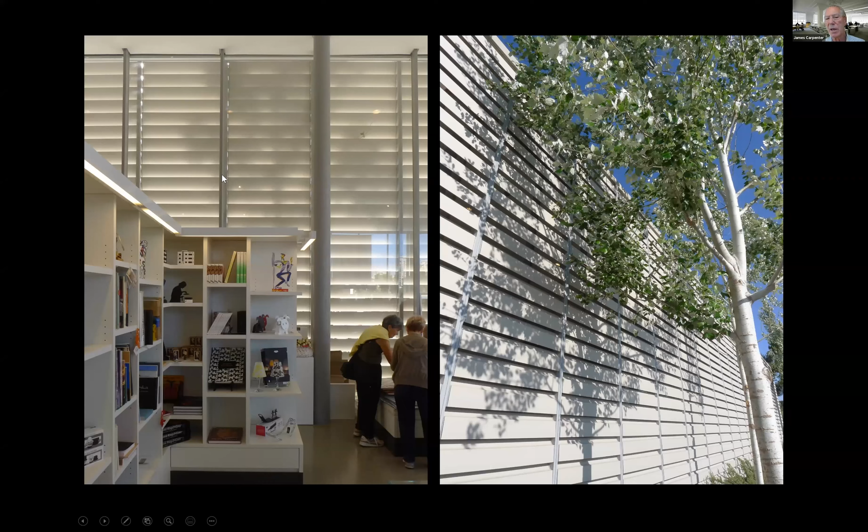So if you move ahead here, this is what you have. This is like at the time of the buildings being built. It's much more active now, but you sort of see a shadow on the exterior of the building projected on the left-hand side into the space itself. So you get this movement and wind and people walking, but you're not actually seeing it directly.

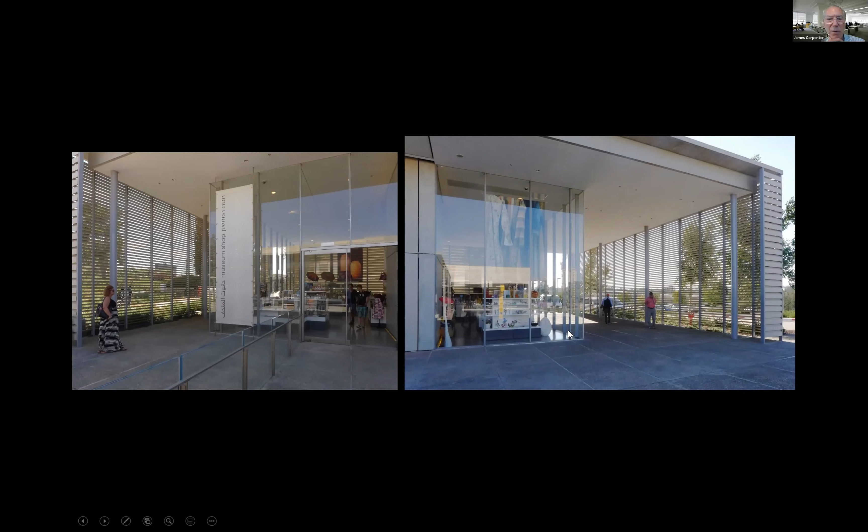And then this is the idea that you can look through north-south, so you can see out through these, but they're providing shading for those spaces. We'll go one more here, a couple more of this project. Throughout the whole landscape, there are shaded walkways by these very simple planted areas and little pergolas overhead that provide shade.

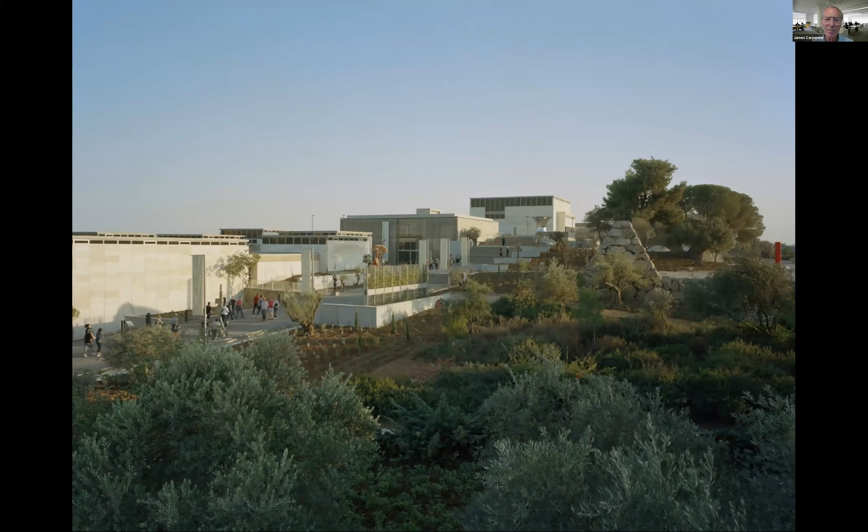I think we have one last one to show you the quality of the landscape that's shared, and then this final project. This is the Frost Amphitheater at Stanford. It was an amphitheater built in the 1930s.

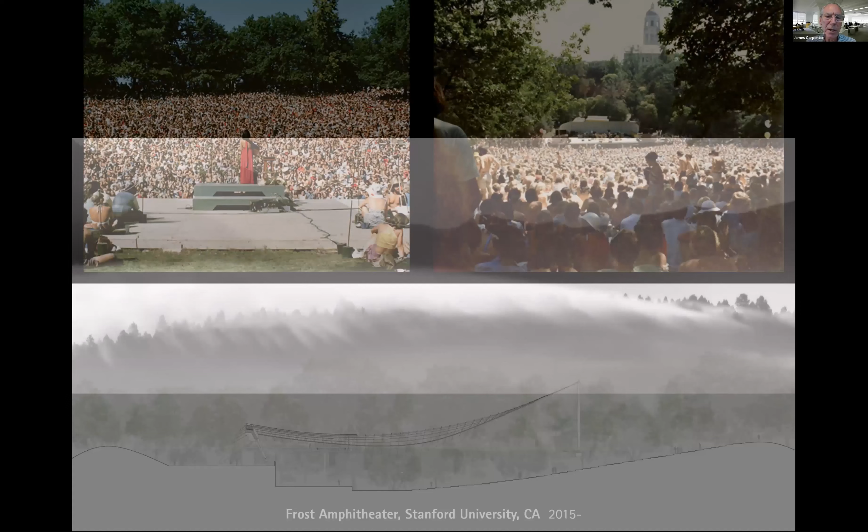And I'm just going to run this little video for you as a conclusion that Joe and I worked on. What you're looking at here is sort of the fog coming over the mountains, and it clings to the treetops. So we just took that very organic form of that fog or mist. And then on the bottom here, a section through the canopy structure. It's nested relatively low in this space.

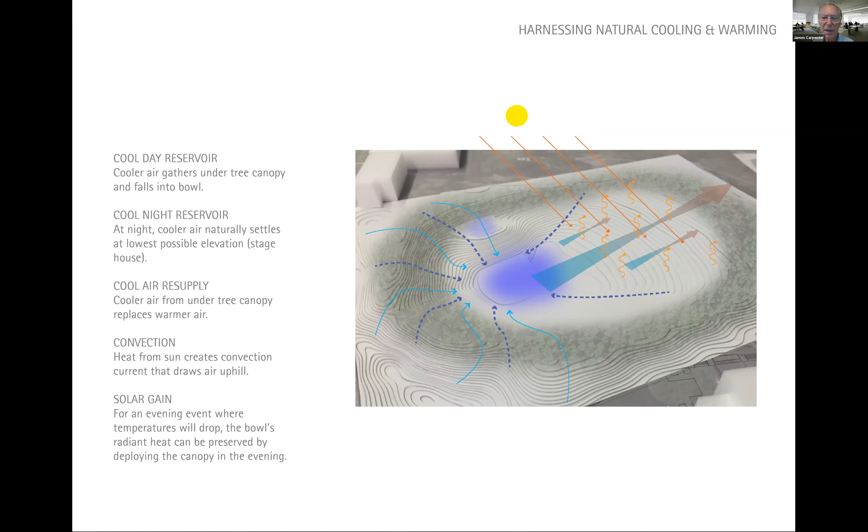How it works in terms of either raising or lowering the temperature of the building. And the very famous venue, Joan Baez, Jefferson Airplane, you name it, they all played here at one time. It holds about 8,000 people, and we were asked to provide shading and environmental control for up to about 3,000 people.

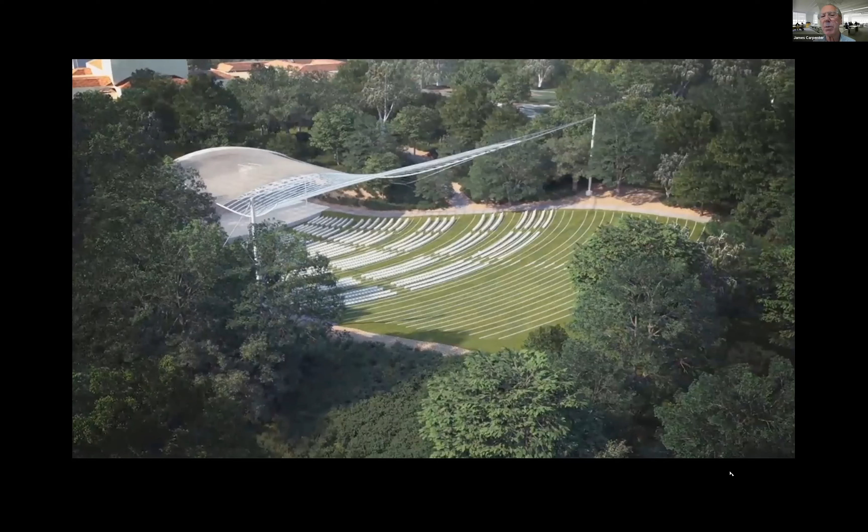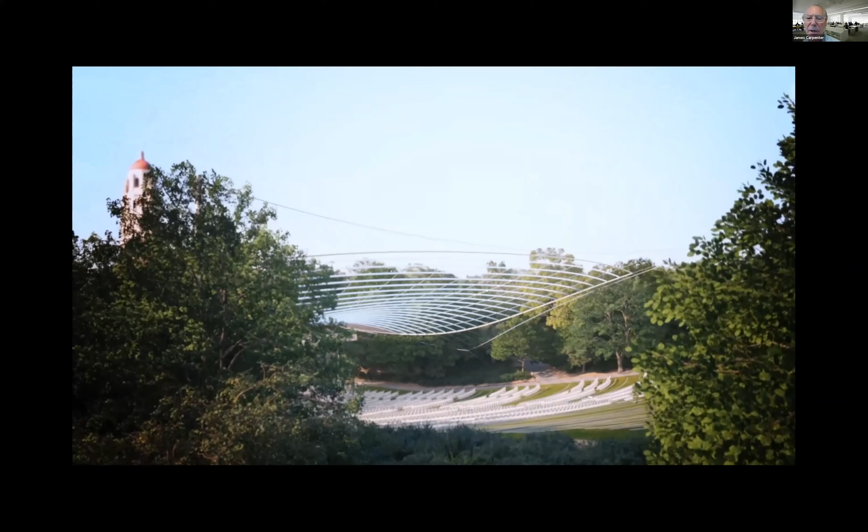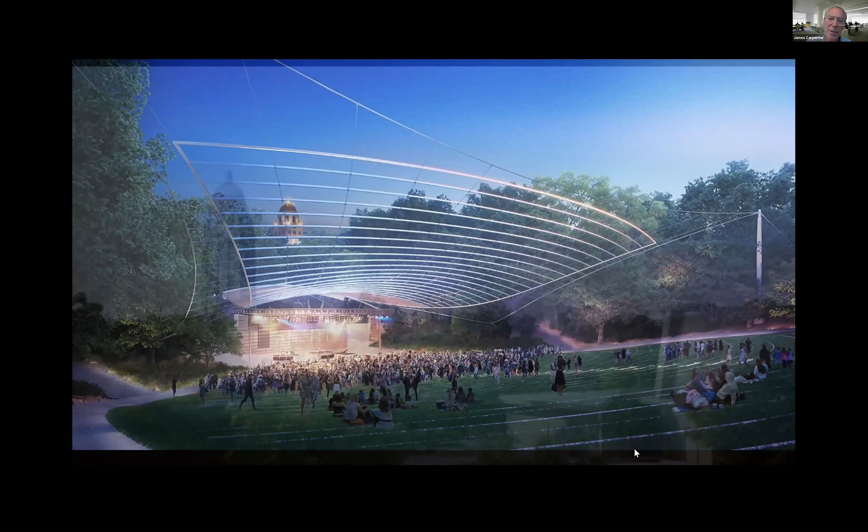So the whole idea of nesting this lower in the space comes back to working with shadow and light, and how you make it a space that people feel comfortable in and animated by. As the sun sets, because this is residing low in the space, you get the shadow of the trees falling on that canopy overhead. So you're in this space, the canopy of the trees is around you, and the canopy of the trees is above you.

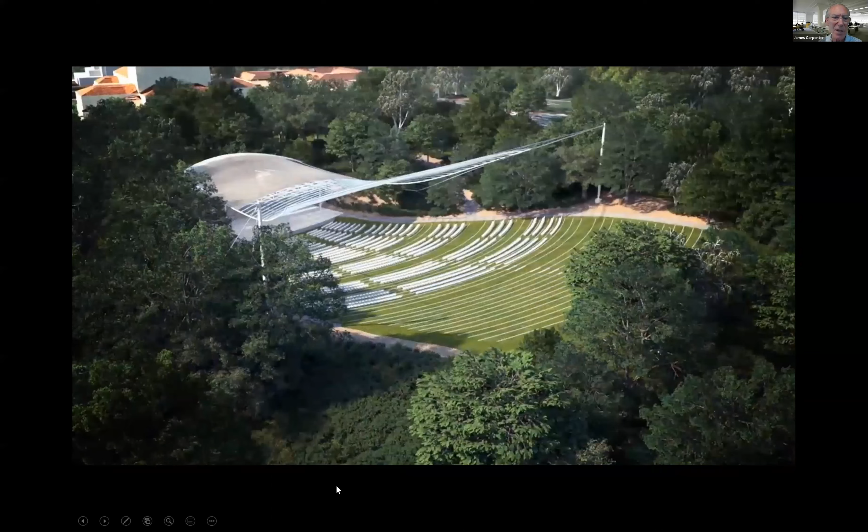So we don't seem to be able to run this video for you, but that's sort of our last slide. I just hope we touched on some of the points, which I'm sure you may have questions about.

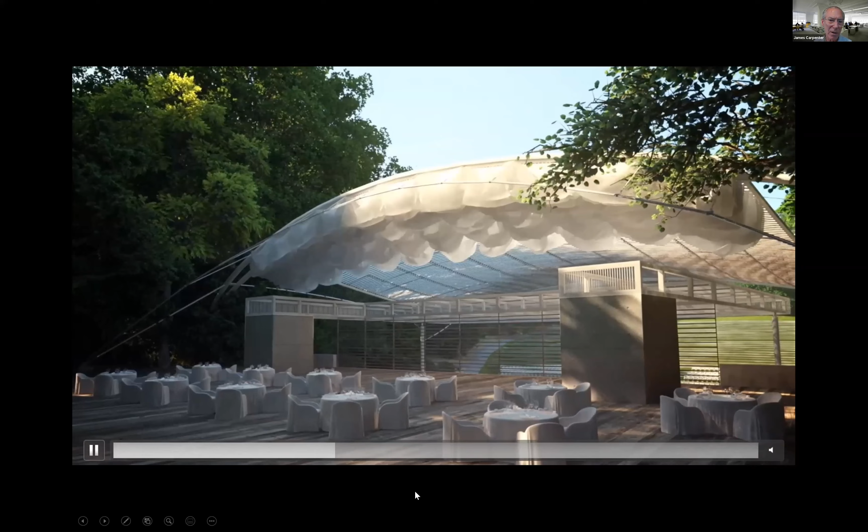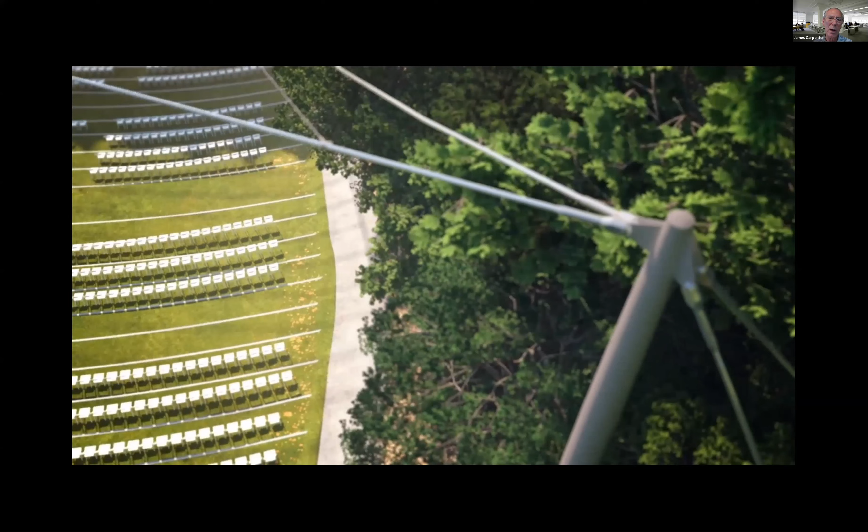But just this whole idea of interaction and light, and materials, how we find different materials appropriate for the particular problem we're addressing or the opportunity. And then this whole awareness of the environment, how we're always trying to restate, refine, or reframe qualities of nature that exist around us, and bring that into everyone's collective experience. And this whole idea of creating works which are distinctly related to their particular environment. This would not really be a logical solution anywhere else, but it happens to fit this particular environment perfectly.